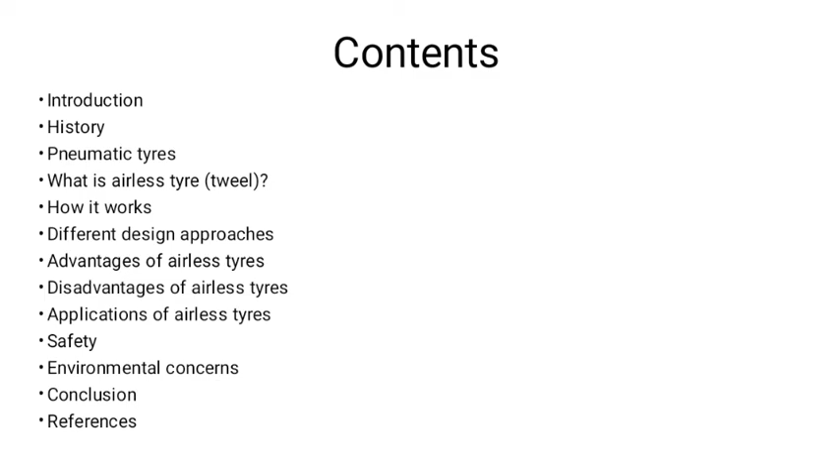Introduction. For more than 100 years, vehicles have been rolling along cushions of air encased in rubber. So we'll be discussing the development of airless tires, something that has become more prevalent in the past few years. A few tire companies have started experimenting with designs for non-pneumatic tires, including Michelin and Bridgestone, but neither design has made it to mass production.

Creating a new non-pneumatic design for tires has more positive implications than one might think. For one thing, there are huge safety benefits. Having an airless tire means there is no possibility of a blowout, which in turn means the number of highway accidents will be cut significantly.

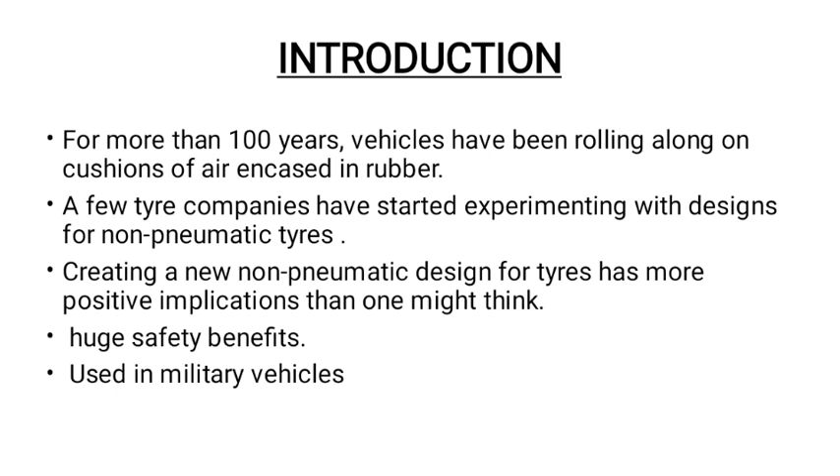Tires are the weak point in military vehicles and are often targeted with explosives. If these vehicles use airless tires, this would no longer be a concern.

History. Going back in history, initially a craftsman known as a wheelwright forged a band of iron or steel, tying the wheel segments together as the metal constricted around the wheel. In 1891, the detachable pneumatic tire was invented by two brothers, the Michelins, consisting of a tube bolted onto the rim.

In 1948, Michelin developed the first radial tire, a revolutionary achievement as it used steel-belted radial tires. The advantages included longer life and increased mileage for the vehicle. However, it required a different suspension system and so was slowly adopted.

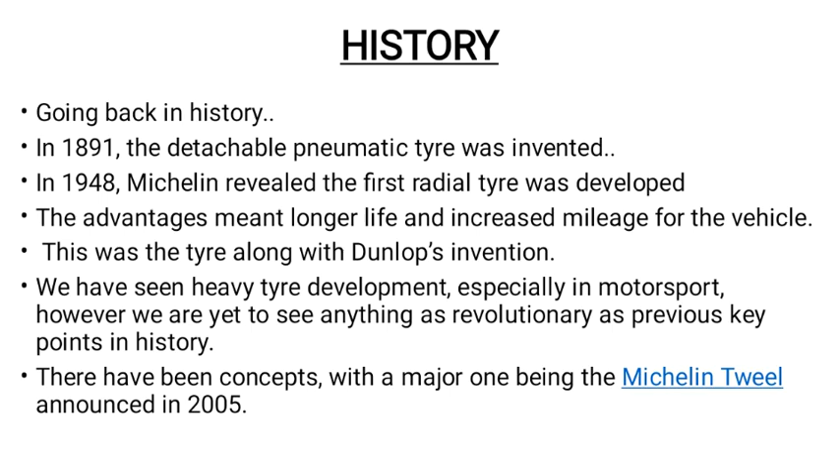This was the tire along with Dunlop's invention, which gives us the tire we have today. We have seen heavy tire development, especially in motorsport. However, we are yet to see anything as revolutionary as these previous key points in history. There have been concepts, with a major one being the Michelin Tweel, announced in 2005.

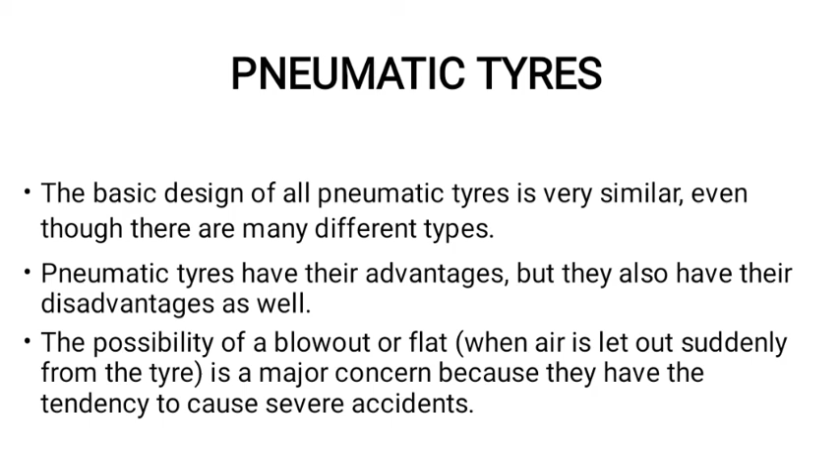Pneumatic tires. The basic design of all pneumatic tires is very similar, even though there are many different types. Pneumatic tires have their advantages, but they also have disadvantages as well. The possibility of a blowout is a major concern because they have the tendency to cause severe accidents.

What is an airless tire or Tweel? An airless tire or non-pneumatic tire is a tire that is not supported by air pressure. These tires are also called Tweel, a merger of the words tire and wheel. This is because the Tweel does not use a traditional wheel hub assembly.

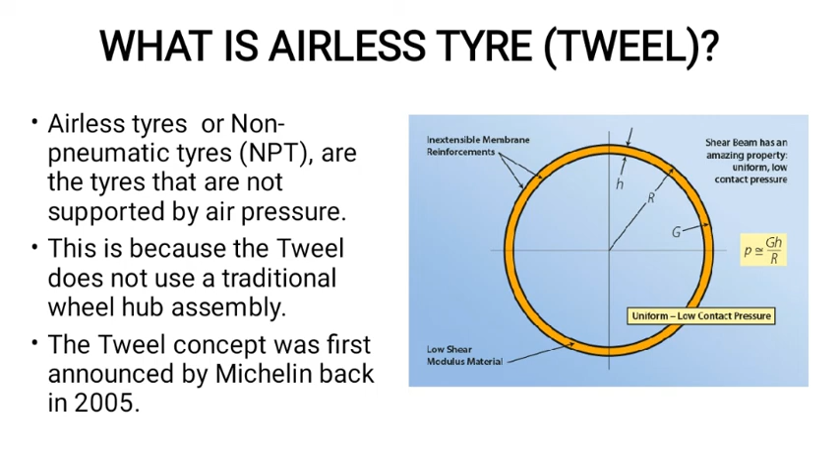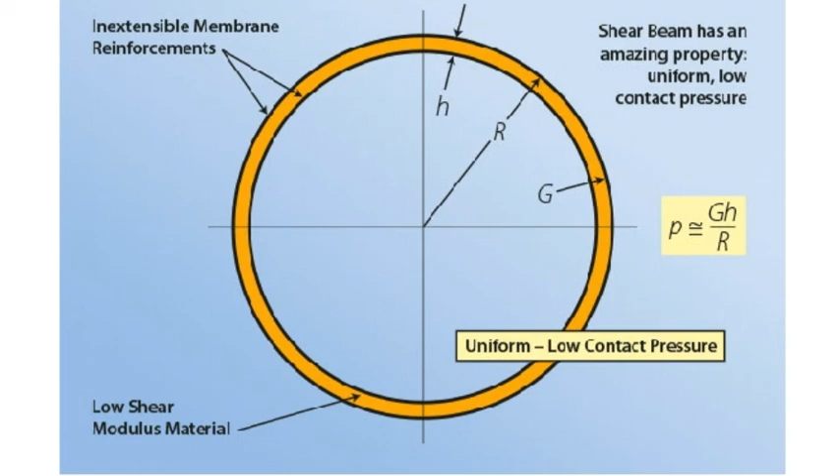The Tweel concept was first announced by Michelin back in 2005. Its structure is a solid inner hub mounted onto the vehicle axle, surrounded by polyurethane spokes. This forms a pattern of wedges which helps absorb the impact of the road. The spokes look similar to those found on a bicycle and play the shock absorber role of the compressed air in a traditional tire.

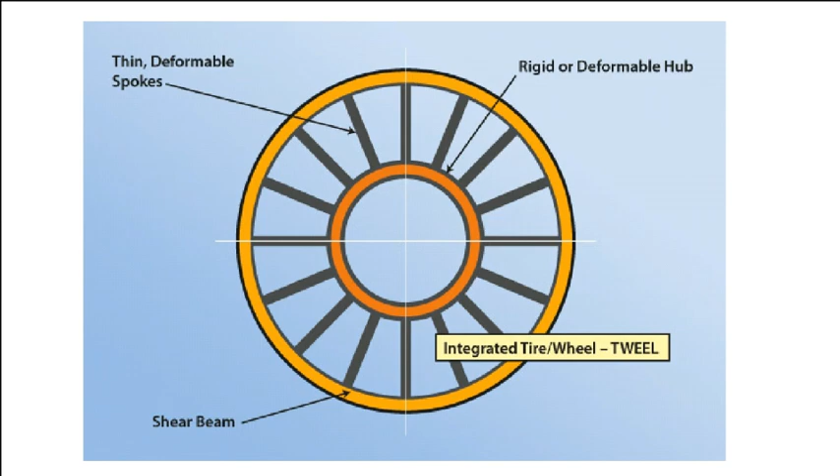A shear band is stretched across the spokes which forms the outer edge of the tire. It is the tension of the band and the strength of the spokes that replace the pressure used in traditional tires. When a vehicle drives over an obstacle, a sleeping policeman for example, the tread and shear band give way as the spokes bend before quickly bouncing back into shape.

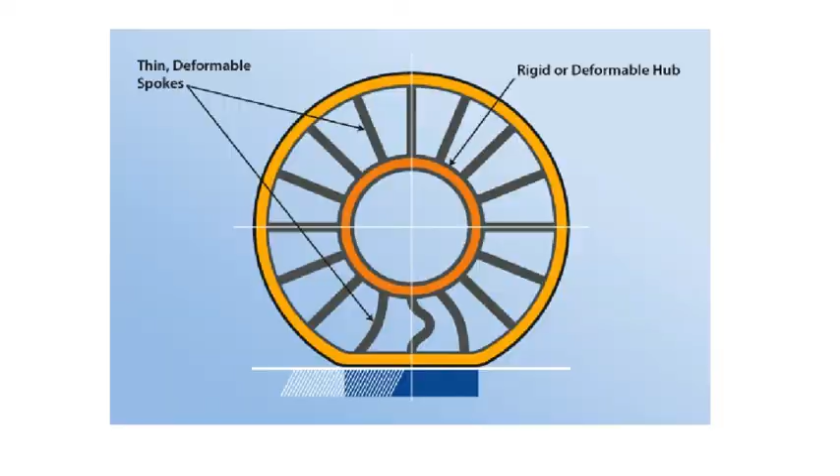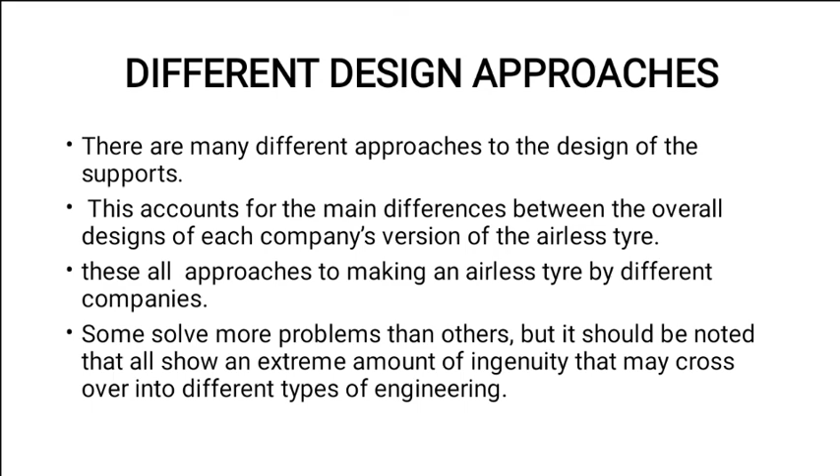Different design approaches. There are many different approaches to the design of the supports. This accounts for the main difference between the overall designs of each company's version of the airless tire. The following are approaches to making an airless tire by different companies. Some solve more problems than others, but it should be noted that all show an extreme amount of ingenuity that may cross over into different types of engineering.

NASA and the Apollo Lunar Rover. The first major attempt at creating an airless tire was for NASA's Apollo Lunar Roving Vehicle. The tire was made of steel strands woven together to form the shape, and they were coated with zinc. In order to gain traction, titanium chevrons were added to the outer surface.

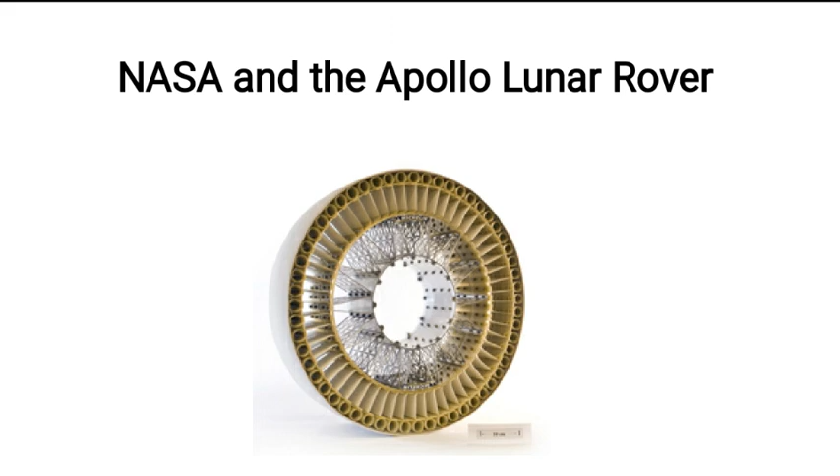Michelin. The next main attempt at creating an airless tire was called the Tweel, by the tire company Michelin. The design consisted of a thin rubber tread with V-shaped spokes made of polyurethane.

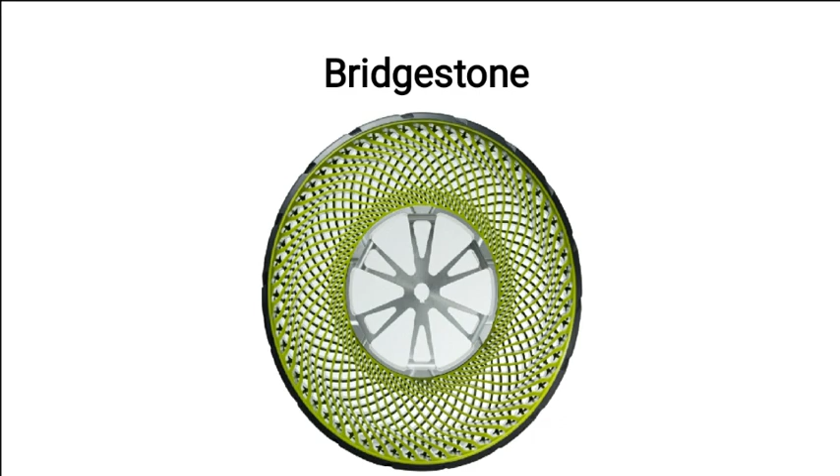Bridgestone. Another model for non-pneumatic tires came from the well-known tire company Bridgestone. Although very similar in concept to Michelin's Tweel, there are some key differences. The core is made of rigid aluminum with thermoplastic spokes radiating outward at an angle in opposite directions on each side, creating more stability and less lateral movement in the tire.

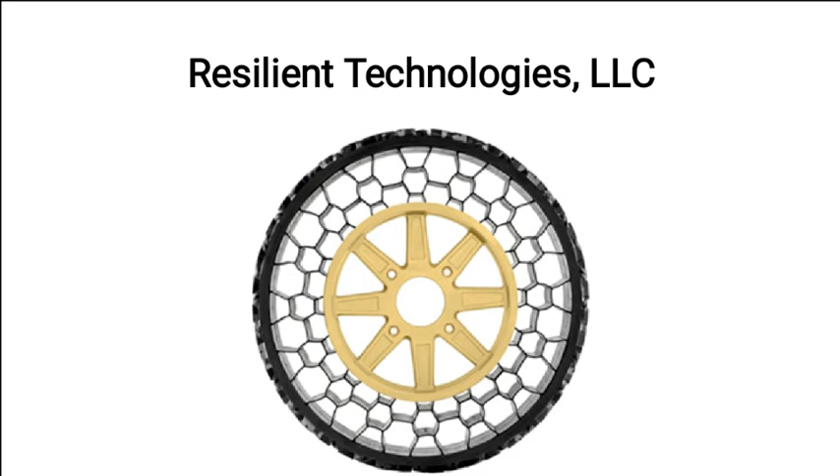Resilient Technologies LLC believed airless tires would be extremely beneficial to the military, and is working with them to develop such tires for Humvees. To meet the requirements of heavy loads and rough terrain, these tires have an industrial look, with an outer tread and a honeycomb-like structure inside that allows the load to be evenly distributed around the tire.

The most convenient design for everyday vehicles comes from a company called SciTech. Their tire fits on standard rims, unlike previously mentioned models, and looks like a regular pneumatic tire from the outside. Instead of supports radiating from the center, their supports are spring-like. There are 100 supports per tire, with 9 in contact with the road at any one time. A secondary support system distributes load to all supports, each with 550 pounds of strength, made of thermoplastic glass fiber composite material.

Hankook iFlex. A futuristic design concept, the Hankook iFlex is an airless wheel and tire all in one. With the iFlex, Hankook presents a prototype non-pneumatic tire that will help increase the overall efficiency of vehicles, thereby improving their energy balance.

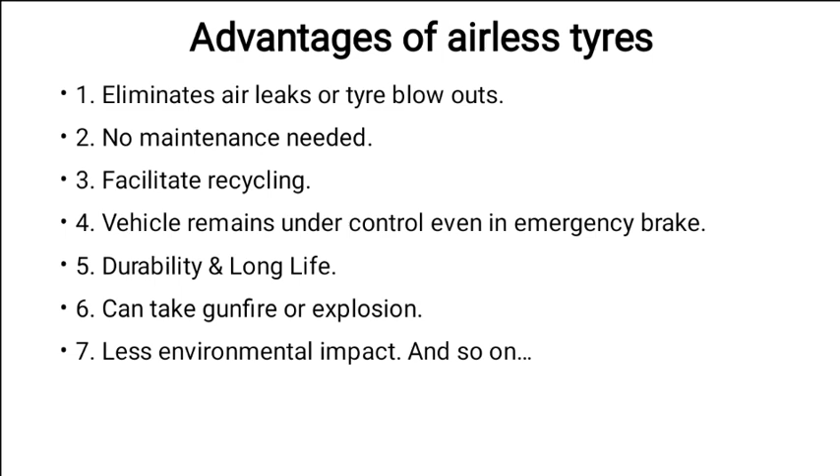Advantages of airless tires: eliminates air leaks or tire blowouts, no maintenance needed, facilitates recycling, vehicle remains under control even during emergency braking, durability and long life, can take gunfire or explosion, and less environmental impact.

Disadvantages of airless tires: lack of adjustability, not as economical as pneumatic tires, vibration, and a different manufacturing process. These are all disadvantages, but non-pneumatic tires have more advantages compared to disadvantages, so that's why non-pneumatic tires have become extremely popular.

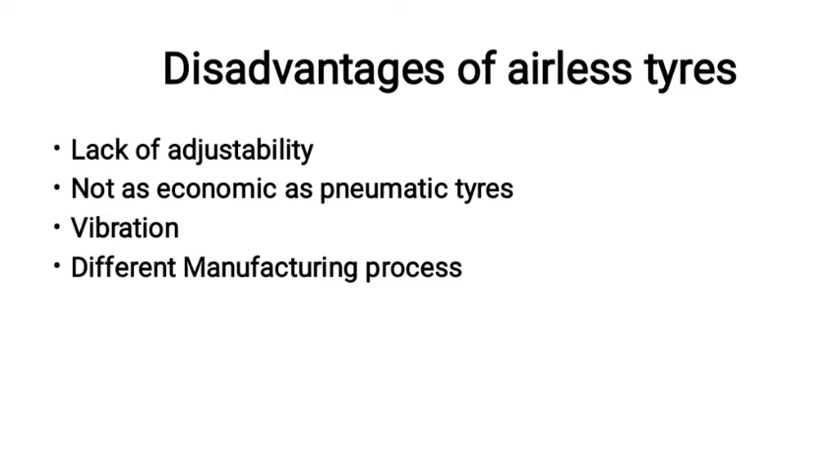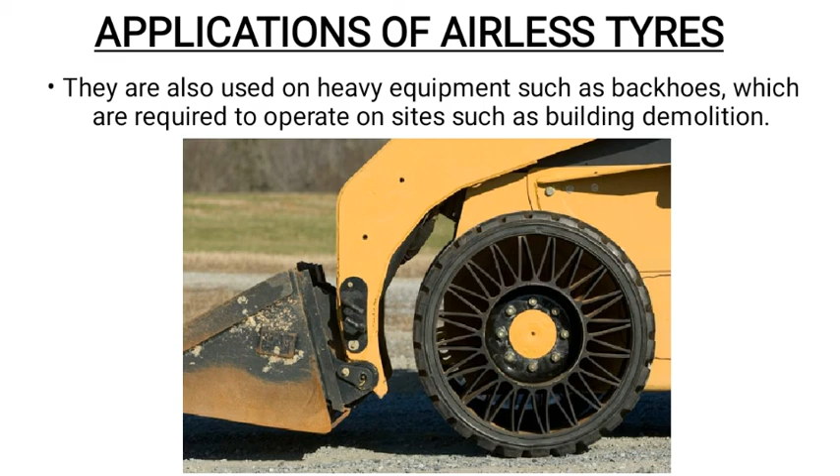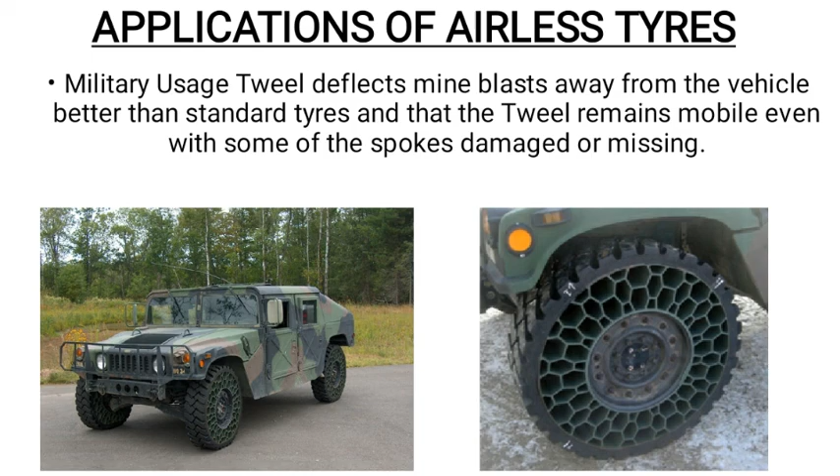Applications of airless tires: they are used in small vehicles and also in heavy equipment. In military usage, they deflect mine blasts away from the vehicle better than standard tires, and the Tweel remains mobile even with some spokes damaged or missing.

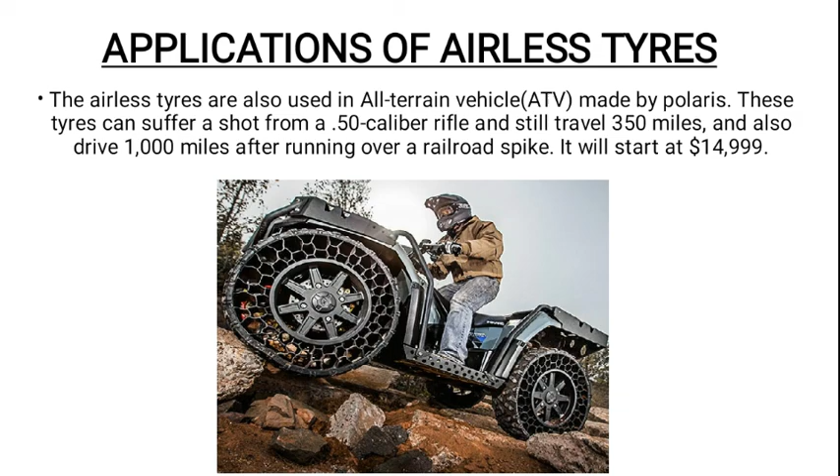Airless tires are also used in all-terrain vehicles made by Polaris. These tires can suffer a shot from a 50 caliber rifle and still travel 350 miles, and drive 1000 miles after running over a railroad spike. They start at $15,000.

As stated before, the main danger of pneumatic tires is the chance of a blowout, which usually occurs at highway speeds. A blowout is when a tire basically pops or deflates rapidly, causing the driver to lose control of the car and risk hitting another vehicle. With airless tires, this is no longer an issue; there is no chance of blowout and drivers don't have to worry about changing a flat.

Better handling is also a benefit when it comes to safety. Although it does not vary by much, that extra stability in the tires helps the car go exactly in the direction steered, which is especially helpful when swerving to avoid an obstacle such as an animal or another car. So improved handling is not just for a better driving experience.

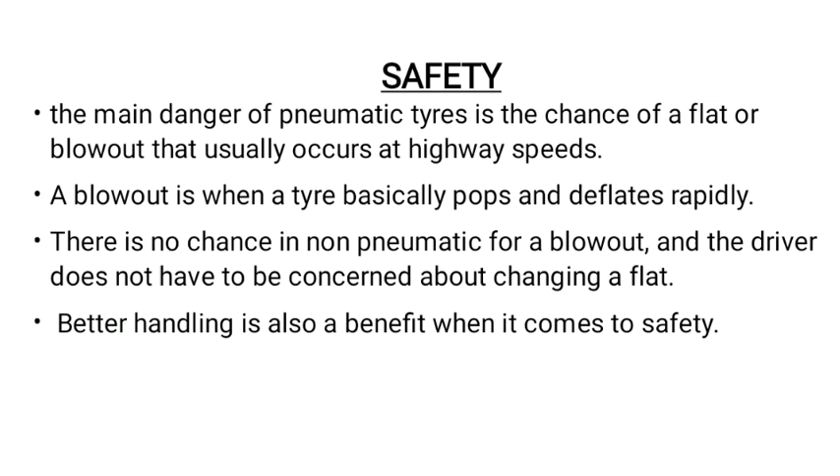Environmental concern: non-pneumatic tires are also expected to have a positive environmental impact. As of now, tire companies must address the growing mountain of spent tires defiling the landscape, and find a way to recycle or create something that lasts longer and can be recycled. In the case of airless tires, it can be the latter.

SciTech airless tires are said to be able to outlast the car. This has enormous environmental implications, because with so many cars on the road, there are many old tires that have to be disposed of. Airless tires mostly use composite material, so there is only a small amount of rubber that actually goes into them.

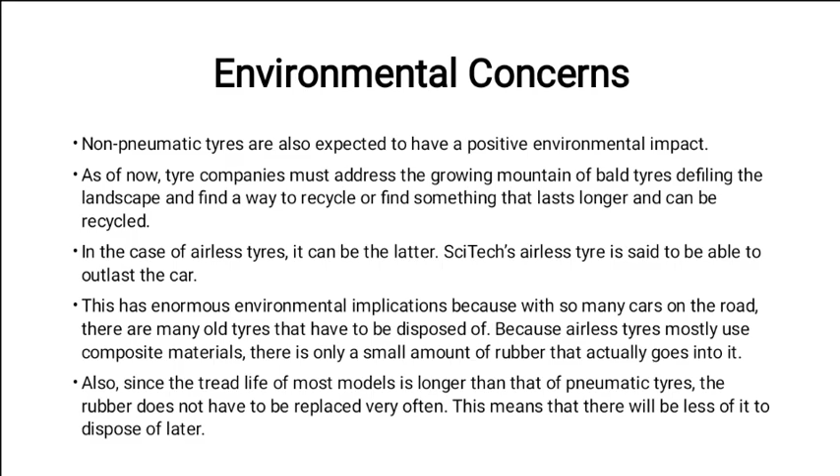Also, since the tread life on most models is longer than pneumatic tires, the rubber does not have to be replaced as often, meaning there will be less of it to dispose of later. Conclusion: this new technology will increase the safety of cars as well as have a positive environmental impact. Since these tires are also able to be retreaded, there is a possibility of a smaller cost per tire, which is always embraced by the customer or consumer.

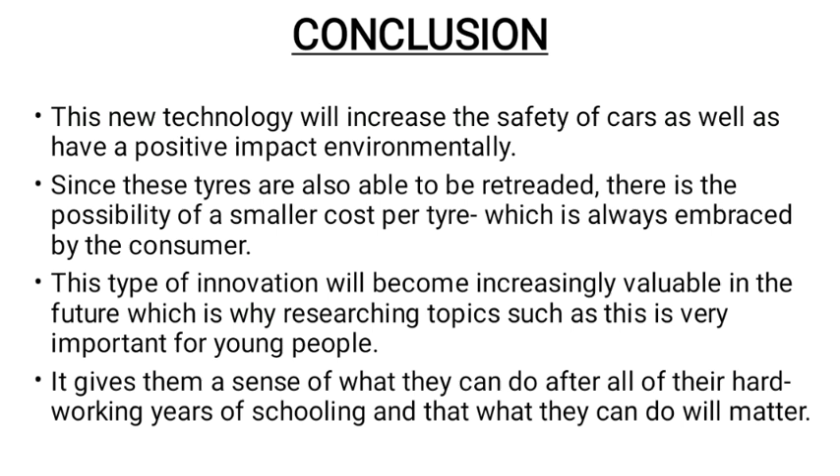This innovative project is also backed and guided by engineering codes of ethics, which will ensure the development is conducted responsibly and fairly. This type of innovation will become increasingly valuable in the future, which is why researching topics like this is very important for young people. It gives them a sense of what they can do after all their hard working years of schooling, and that what they can do will matter.